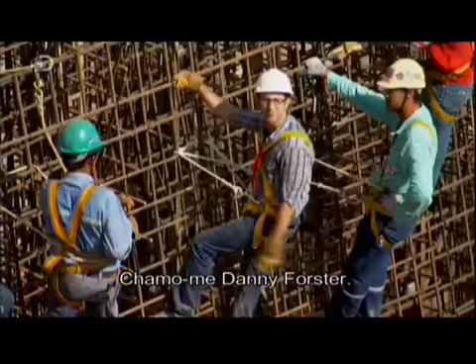As an architect, I travel the world investigating some of the most amazing design projects ever attempted. And right now, I'm going to take you behind the scenes of the most important construction project in Brazil.

In the next few years, Rio will host the Olympics and the World Cup. But before the city takes the world stage, Brazil has got to fix a major power shortage. Brazil had one of the worst blackouts in history, leaving over 60 million residents without power nationwide. A crew of 3,500 is hard at work on one of the largest hydroelectric power plants ever built. To generate enough power, the team is taking a river with more water than the U.S. uses in a single day, and they're moving it.

If you hit a mountain, you go through it. Exactly. To reroute 16 miles of river, they're blasting their way through 7 mountains, creating the largest tunnels on the planet. So we've got to remove this rock obstacle. Yes. We're not using a shovel to do it, are we?

With all eyes on Rio, Brazil is determined to keep the games from going black. Go, baby, go. No stop signs. Let's go.

Welcome to Rio de Janeiro, the crown jewel of Brazil. Located in the southeast corner of Brazil on the Atlantic Ocean, Rio is home to 6 million people, the second largest city in South America.

This city is famous for Carnival, the single largest party in the world, samba dancing, and Christ the Redeemer, the enormous iconic sculpture perched atop Corcovado Mountain. Soon, Rio will be known for something else, as only the third city in history to host both the World Cup and Olympic Games back-to-back.

The entire world will be watching this city when over 4 billion people tune in to see the games. The problem is, Rio may not be ready because this city suffers from blackouts.

Just 1 month after winning their Olympic bid, Brazil suddenly went dark in one of the largest blackouts in human history. For 5 hours, 60 million people were without power. With 750,000 tourists attending the games and over 2/3 of the planet watching on TV, the people of Rio are desperate to keep the lights on.

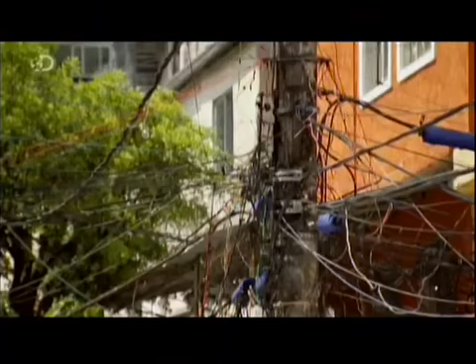The city has less than 4 years to generate enough energy to power 2 marquee events. Their solution lies 3 hours north of the city, where they're building a massive hydroelectric power plant deep in the mountains.

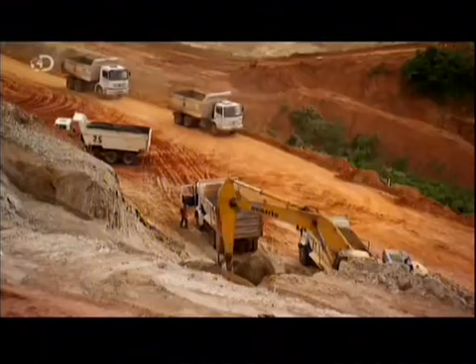So I've just arrived in the town of Sapucaia, and I'm about 100 miles outside of Rio. This town, sitting on this body of water, is the site for the new hydroelectric project, one of the largest infrastructure endeavors on Earth. The Anta and Simplicio project is a job site larger than Manhattan.

Workers here are reshaping some of Brazil's most difficult landscape in order to harness the energy from this, the Paraíba do Sul, a nearly 700-mile-long river that will supply the hydroelectric plant with enough water to fill 1,000 football stadiums. But the location of the river is the project's greatest challenge.

Now, the issue is if they put the hydroelectric plant right here, the reservoir required to feed this plant would cause a big flood, so large that it would destroy all of the forests here and require this entire town and 2 others to have to relocate. So instead of moving the people, what they're going to do is move the river.

To save the town of Sapucaia, engineers are doing something incredible with this winding river, in one of the largest water-moving efforts since the Panama Canal. Starting with a dam, they're diverting the river through 13 canals, 5 reservoirs, and tunneling through 7 mountains.

Water will safely flow towards 3 of the most advanced turbines ever built. In order to handle 780 billion gallons of rushing water, these tunnels need to be some of the widest ever created. If they're too narrow by even a few feet, the water could back up, causing a devastating flood. Right now, I'm heading into the mouth of tunnel 3, the very largest tunnel.

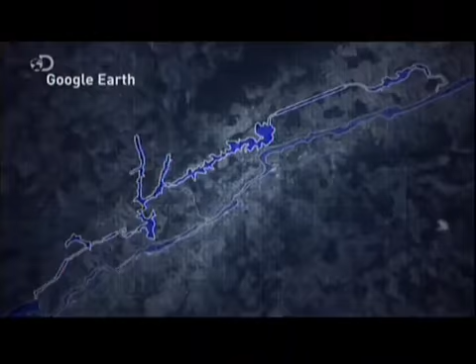And having been in a number of tunnel projects before, I have never seen a mouth of a tunnel this big. This is the longest of 7 tunnels, spanning nearly 4 miles. The further you drive in, the farther you get from daylight, and the darker, the weirder it gets. In total, workers have to remove over 45 million cubic feet of rock, enough to cover Central Park in over a foot of earth.

Going in. With the weight of a 240-foot mountain above, the team has developed a safe way to build one of the largest tunnels in the world. It's a 2-step process. Step number 1 is what you see they've already done: they blasted out this entire 26-foot tall semicircle. The second step is to go straight down. So basically, we're going to drill holes and blast down an additional 26 feet.

Okay, so how many holes do we have in this field right here? Here we have 52 holes. 52 individual holes. And how much explosives are you putting into each individual hole? In the middle, we put 40 kilos per hole. So when we're done today, this will look like that. Correct, exactly. We're not using a shovel to do it, are we?

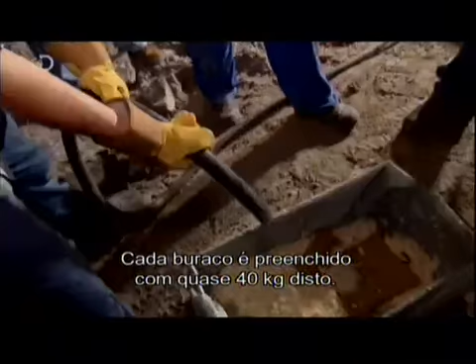What we're using is a liquid explosive. Each 20-foot hole is filled with nearly 90 pounds of the stuff. So Marcel, he's holding a hose connected to a truck, mixing together explosive liquid. Yeah, it's a liquid, it's a mix. It's like you have to put in a little bit of oil, a little bit of vinaigrette, and you make an emulsion, and it makes your salad taste good. This is different, it's not salad. It's a bomb. Correct.

Whoa, there she is. This kind of tapioca-like gooey substance is actually the emulsion, the liquid ammonium nitrate, the water, and the oil. This is a bomb. It's explosives, I have a hose full of it. All right, going down, all the way down.

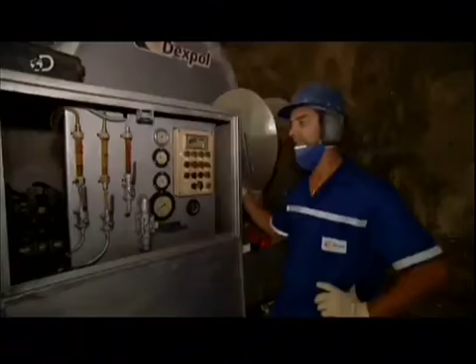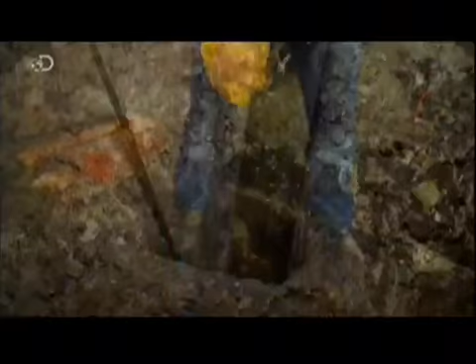Made on site, this explosive liquid emulsion is more stable than dynamite. Okay, I'm at the bottom. Give me the juice. It fills all the empty space in each drill hole, giving the explosion the maximum force needed to break up the rock without causing a cave-in. So as the explosive comes out of my hose, we're slowly pulling it out, filling this thing up. Full? Yeah. All right, so now we have 52 individual holes.

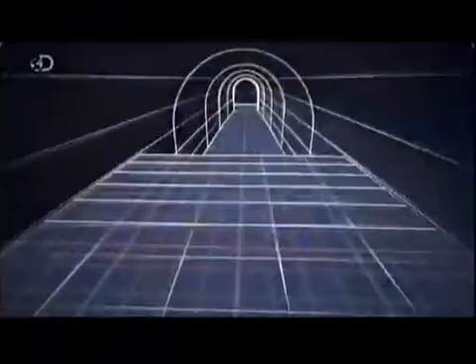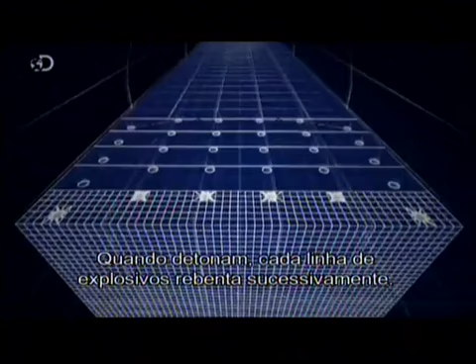Each and every one of them is loaded with a fuse and an entire column full of this liquid explosives. Now we're gonna tie them all together and run away. The holes are dug in 5 lines. Blast engineers connect the fuse in each hole with a series of color-coded time delays. Once detonated, each line of explosives blows up in succession. Like a wave, it pushes through the next 30 feet of rock.

Okay, so am I looking at the plan right now? Are we looking down? Yeah. So this isn't just one gigantic bomb going off? No, we cannot do this because of the vibration. If you explode everything, you will shake the tunnel. Bad idea. Yeah, it's not a good idea.

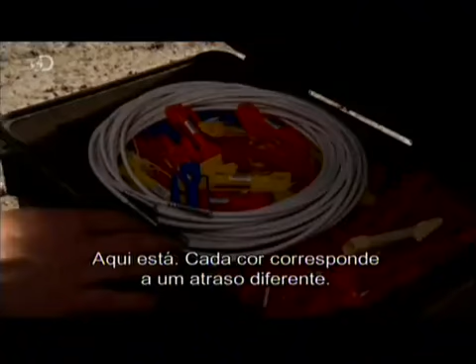Voila. Okay, so each color corresponds to a different delay. So which is which? 30 milliseconds. 150 milliseconds. And so basically by mixing and matching and combining these delays, we can create the shape of the explosion we want. Yeah, that's it. All right, let's do it. This is what it's about, right?

Right below me is one column full of explosives. When it goes off, there'll be a 50 millisecond delay, and it goes on to the next hole. Okay, stick it in, and now you can feel the wires touching the charge. And now I'll take this red piece, and it's in, okay? Live explosives. Let's get out of here.

All 37 delays are now connected. The strategic blast pattern is ready to go. So once we light the fuse, how long do we have? We have 7 minutes to leave the tunnel.

Okay, so we're going to evacuate the tunnel. Getting all the lights, the crew, the gear, everything out. Yes, correct. But not everything is evacuating. The intrepid Danny Cam is going to try and capture the moment for us. You see, the last time we tried this, our camera did not survive the blast. Hoping for a bit better luck this time.

All right, looking good. All right, you are set. Be careful where we step. Okay, that's a bomb, another bomb. So in my hand I have a stopwatch with 7 minutes set for the blast time. In my right hand, I have a lighter. Both are required to safely detonate a tunnel. So, okay, here we go.

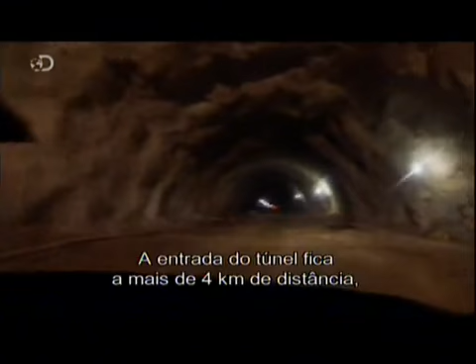Emergency brake. All right. The mouth of the tunnel is over 2.5 miles away, making it almost impossible to reach in just 7 minutes. We're gonna make a left here. Oh, good thing they told me that. Okay, gotta change gear, sorry dude. Our only way out is a small access tunnel located a half a mile from the blast site.

This is ridiculous. I'm actually driving as fast as I can, but the roads are really crappy, so the idea is don't get a flat. Oh, come on, come on. There it is, I'm almost there. I can see the light. A minute and a half to go. Come on car, come on. Get up there, come on, damn it. You okay, Philippe? Yeah. Woohoo!

That just went off the moment we got out of that tunnel. That was not 7 minutes. How many minutes? The phone jumped out of my hand, I was driving so crazy. 6? 5? 5, that wasn't 6, that was. So the blast might have gone off a bit early, but the delays created the expected chain reaction, putting them 30 feet closer to redirecting the river.

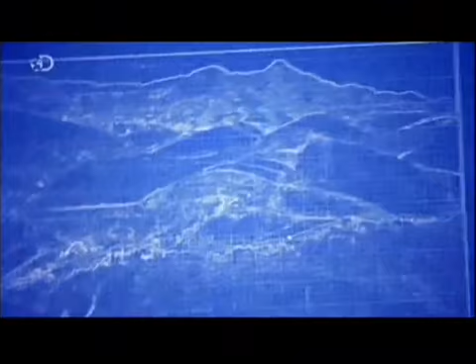I think we're stuck.

Brazil is the most visited country in South America. Tourism is one of its fastest growing industries, nearly tripling in the last 10 years. And Rio de Janeiro is at the center of it all, with an annual event twice the size of Carnival descending on this city, partying non-stop for 4 days straight. Now, to put this in perspective, during the Olympics you'll have that many people and more in this city for not 4, but 16 straight days of events.

Imagine the televisions, all the air conditioning, all that samba dancing. The electrical loads on this city will be unprecedented. The Olympics will bring 750,000 more people to Rio, taxing an already strained power grid. To keep the lights on, the Anta and Simplicio hydroelectric project will supply nearly twice the energy that the city needs for the games. To generate that much power, workers are moving a massive river through a series of tunnels and canals, channeling all that water to an intake valve that directs the river to a powerhouse.

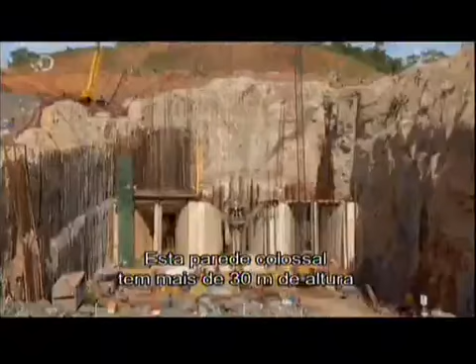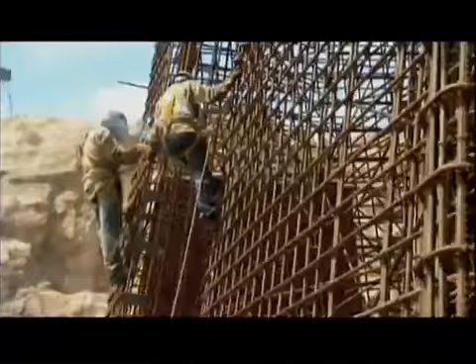As this enormous wall of redirected water comes out of the final canal, it now meets something like the drain at the bottom of a really big bathtub. But while the water drains out, something else has to hold back all that remaining water. Now we're talking about 780 billion gallons of water. What can hold back that much water? Well, it's got to be a really, really big wall. This massive wall is over 100 feet tall, covered in over 4,000 tons of concrete. Its core is reinforced with nearly 75 tons of steel rebar, making it 100 times stronger.

So at this height, I'm basically at the midpoint of the intake. Water would be going in below where I'm standing, down into the hole. But up here, the wall that's holding back the rest of the water is right here. And the guys that are actually building this thing, giving it its strength, installing its rebar, well, they're doing that up there. Well, here we go.

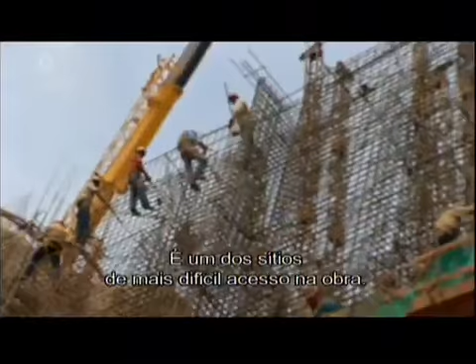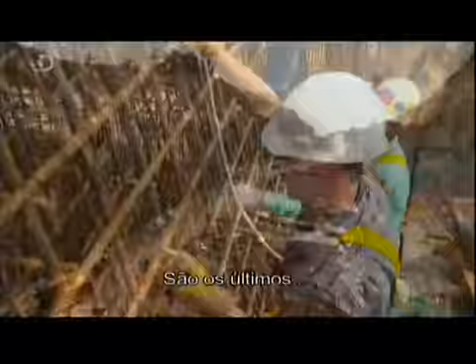We're off. This is one of the hardest spots to reach on the entire job site. One tied off. Workers have to climb a steep 79-degree slope. Not looking down. 10 stories up. All right, last couple. Okay. Woo! Top of the summit.

How you doing? I'm Danny. Hello, who's this over here? Cleope. Cleope and Aldo are going to be my two teammates as we install some last bits of rebar on the very top of this wall. It's going to hold back hundreds of billions of gallons of water. That's a lot of water. See? So the crazy thing is, at this height, at the very height of the wall, the way to get more rebar up to us so we can finish this wall is like that.

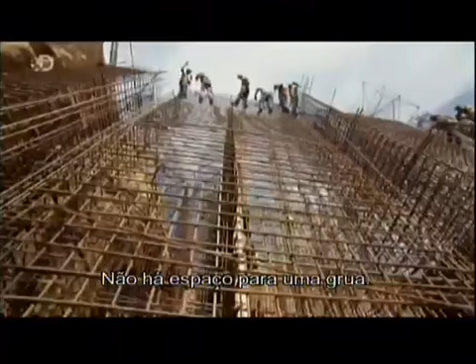There's no room for a crane at the top. So a team of 6 workers hoist each 65-pound piece of rebar using nothing but 160 feet of rope.

All right, okay. Watch out, watch out. All right, coming down, watch your shoulder. Come down by me. Okay, we're at the right height. And now the rebar is generally where we want it.

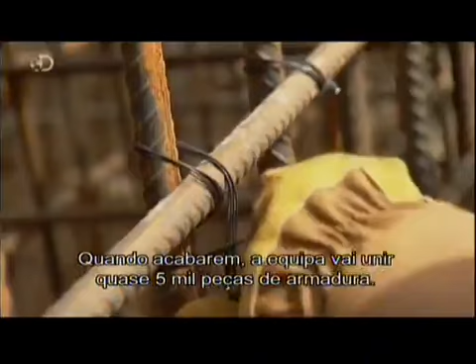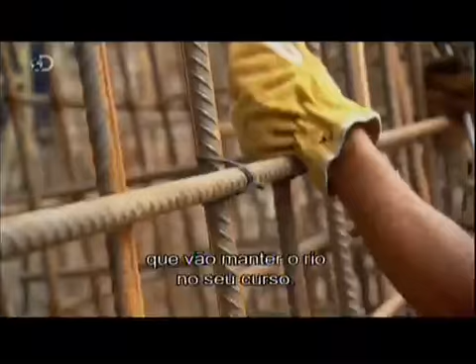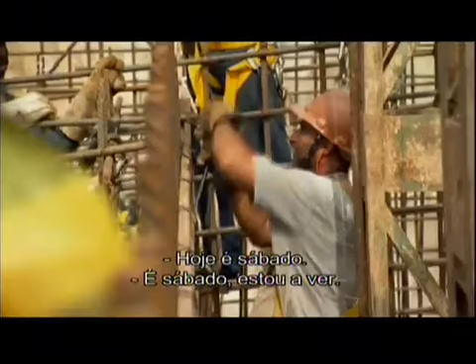So, why is everyone so happy? Why so much cheering? Today is Saturday. Which means tomorrow's no work. No rules, got it. All it takes is a day off and Brazil just blows up.

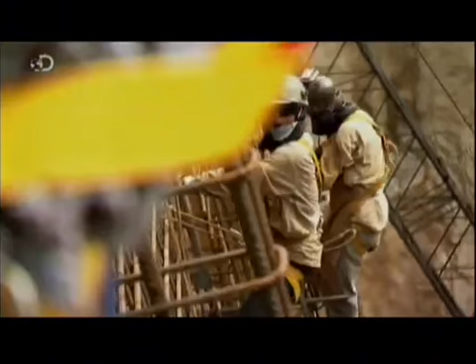There it is. Oh my God, it's like a prison break out here.

Well, it just goes to show just how hard these guys have been working. 6 days a week, almost 16 hours a day to build what will be one of the most important pieces of infrastructure ever to be built in Brazil. And why? To make sure this city, when it hosts both the World Cup and the 2016 Olympics, they don't have a blackout.

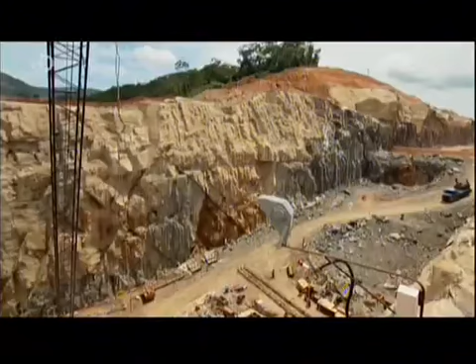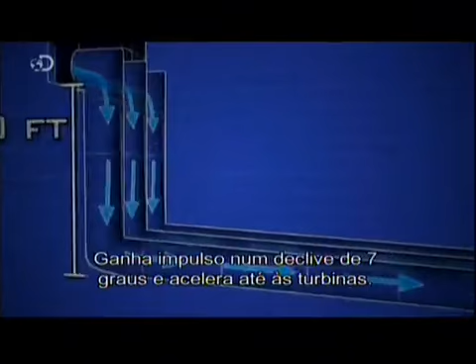Engineers expect a wall of water nearly 100 feet deep to barrel into the intake wall. After the water passes through, it drains at the base of the wall and enters 3 underground tunnels called penstocks, which begin with a 10-story drop to speed up the water. It gains momentum down a 7-degree slope, rushing towards the turbines.

The faster the water, the more electricity they generate. So that's the turbine down there. Yes. And the central idea with the penstock is to do what to the water? Increase the speed and the pressure, both needed to move the turbines.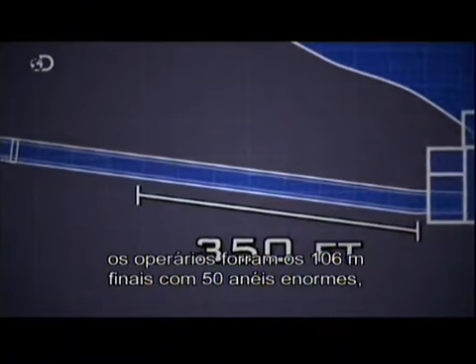And so the water's moving how many meters per second? 10 meters per second, so that's like 20 miles an hour. Water moving that fast would tear away rock from the walls and ceiling. Its force is stronger than a massive ocean wave and capable of causing a tunnel collapse. To reinforce the penstock, workers line the final 350 feet with 50 massive rings, totaling 800 tons of solid steel.

Now, one of the fascinating parts of this process is they're moving a big, heavy object, but they're not using a crane because we're in a tunnel, right? There's no room for a crane. So rather than having a crane operator, we have a truck driver, and an angry one. Let's go meet him.

All right, here we go. Hello sir, how you doing? You know me? Anderson. I'm Danny, nice to meet you. Are you nervous? Heavy piece, we're in a tunnel. Keep it cool, let's do it. Rock and roll, all right.

The ring is attached to a trailer and is more than half the weight of the truck. It'll take everything this truck has to get it into place. Okay, so Anderson wants to crank the RPMs up because he's actually going to want a ton of torque to stay on the truck, so the weight of that steel piece doesn't actually drag the truck backwards.

He's letting the engine tune up. Also, I might add, from afar, Anderson has a very tough exterior, kind of tough truck driver appeal. But here in the cab, this guy's a teddy bear, huh? Yeah, he is, he loves it. All right, here we go, so we're popping in gear.

Wow, I mean, Anderson is basically smacking into the back of the steel ring and quite literally pushing it.

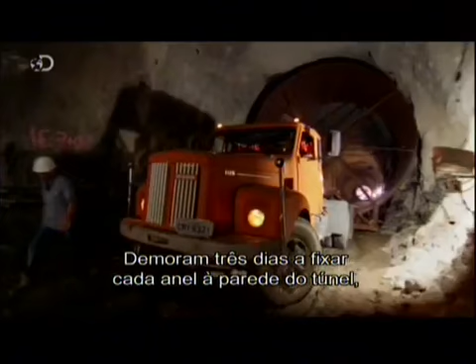It takes 3 days to secure each ring to the tunnel wall, and the crew has 3 penstocks to complete and another 146 rings to install. But for now, this operation has come to a grinding halt. There's a flange on the outside of the steel that kind of protrudes.

This bump out of concrete. So not only is it stuck on the side of the wall, it's actually blocking itself from getting out. We're going to be here for a long time.

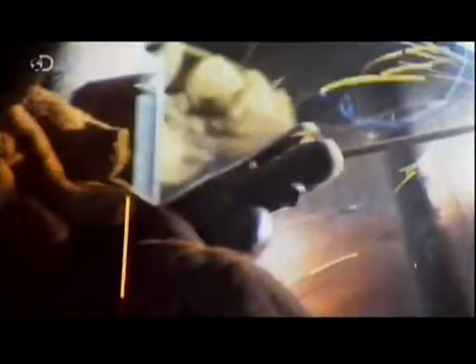Up next, sealing the most advanced turbine ever built with a 3,000-degree welding stick. Touch the rod to any metal.

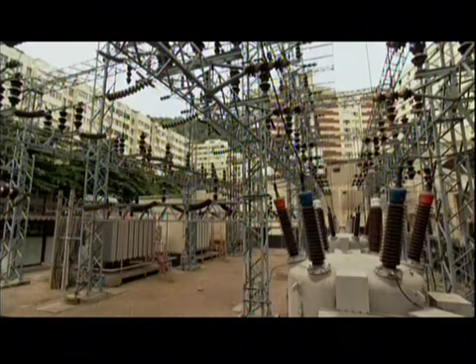Brazil is the 3rd largest consumer of electricity in the Western Hemisphere, with usage doubling in the last 25 years. This country is turning to its greatest resource, water. There are many different ways to make the electricity we need to power our cities. You can burn coal, you can burn oil, you can build a nuclear power plant, you can have a wind farm, even a solar farm.

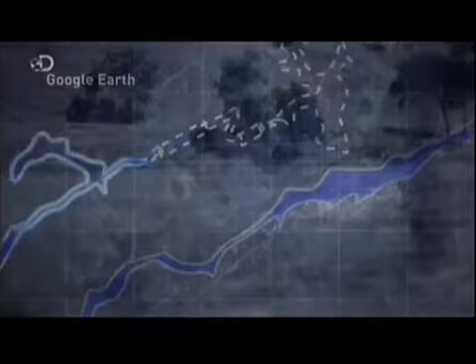Now, for a country like Brazil that has 1/5 of the world's fresh water, a water solution makes obvious sense. The Paraíba do Sul is one of over 120 rivers. In the last 3 years, workers have cleared a new 16-mile path through 7 mountains, removing 650 million tons of rock.

To this, right here. This thing behind me is called the spiral casing. And this is where the water finally makes electricity.

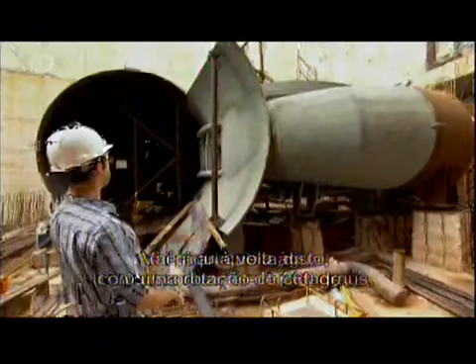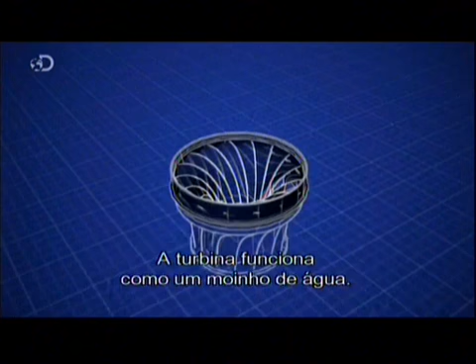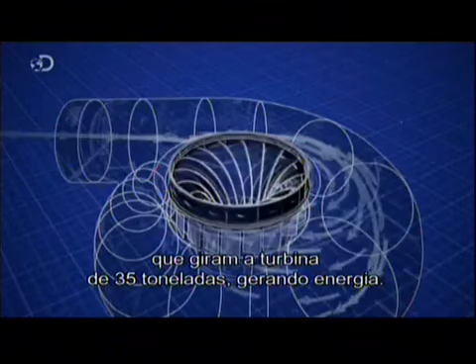It's going to spin around this, pulling a 360-degree turn, all the while rotating the blades of the turbine. The turbine acts essentially like a water wheel. As water rushes around the spiral case, it pushes 13 angled blades, spinning the 35-ton turbine and generating power.

The challenge: keeping the water from losing speed as it flows around the tube. The answer is the same thing we use when we're washing our cars with a garden hose, right? If you pinch the garden hose, the water goes faster. So if we decrease the diameter of the hose, we increase the pressure of the water. Same principle, just much bigger.

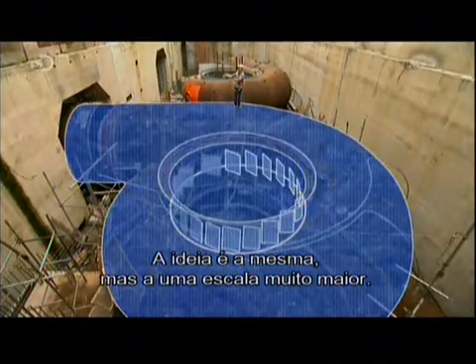The water comes into the spiral casing at a diameter of 13 feet. And as the water goes around the curve, the tube gets progressively smaller, starting at 13 feet and ending at 4 feet. So when the water comes in, it travels the exact same speed all the way around the circle. The 62-ton spiral case is actually composed of 70 steel plates.

Coming in, here we go. Okay, to make the turbine spin evenly, it must be turned into one smooth, frictionless surface by a team of 4 welders. All right, your name? Quasmi, I'm Danny. Quasmi, you're the welder, huh? So what Quasmi's up to is he's welding on these pad eyes. We'll put one on this piece of steel. We're going to break it in order to close the gap between 2 pieces of steel, weld it up, and make it one smooth curved surface. Okay, let's do it. Gloves?

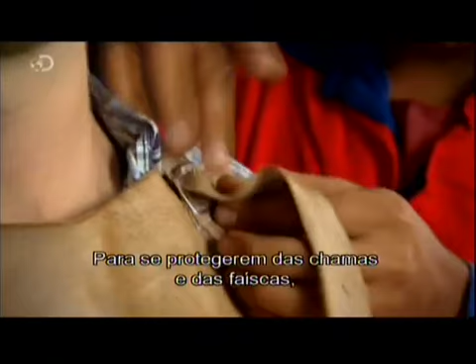Quasmi's welding stick burns at 3,000 degrees. And to protect against flame and sparks, these guys wear welding jackets made of fire-resistant leather. Beautiful. Okay.

Are you okay? What do you think?

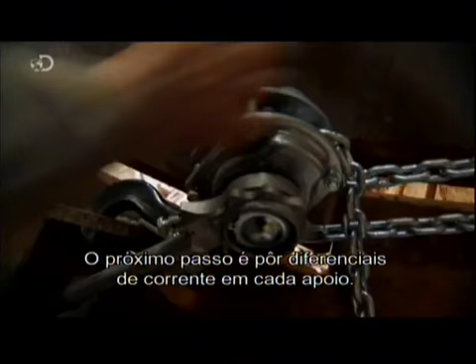So we're going to have to have it welded more. All right, so Crosby's going to actually finish the thing up. Now, next step is the guys will put chain blocks onto that pad eye. Once we put tension on the line, we can pull the pieces of steel closer together, because in the end, they're taking these different individual curved segments and making one long curved tube that lets the water rapidly turn around and spin the turbine.

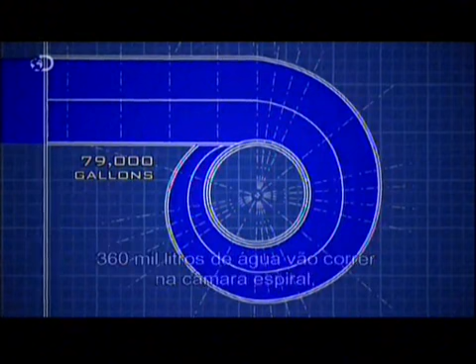79,000 gallons of water will rush through the spiral case, with nearly the same force as a rocket during liftoff. Powerful enough to rip the 1-inch thick steel plates wide open.

Now, to prevent that, the crew must entomb all 3 cases in over 2,000 tons of concrete.

But they have to first make sure the cases don't leak, by filling them with water. The problem is you can't fill it with water if you have holes in it. So right now what we're going to do is plug up the holes of that donut to let them fill it with water. We're going to do that with this big cylinder right here.

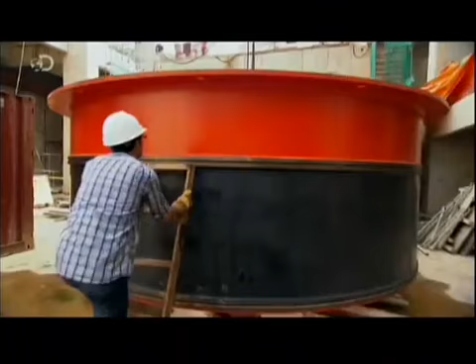The plug is actually a 32,000-pound steel ring. All right, let's shackle it up. And once lowered into place, it will seal up the spiral case, making it watertight.

Okay, so everything in Portuguese is different from English, even the crane operator instructions. So for example, going up with the crane? Para cima. Cima. Para cima. And for going down? Para baixo. Para baixo. All right, so he gives us a thumbs up.

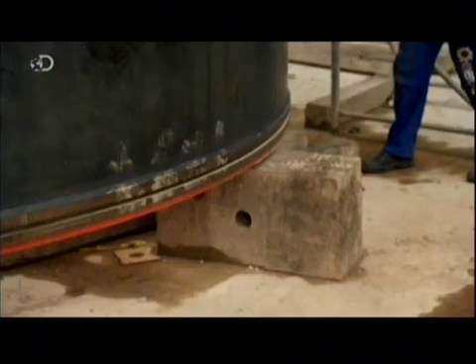Okay, bring her up. Here she comes. 16 tons, wide load. All right, clear the way, we're going to start traveling. Now, one of the key things to keep in mind when you're flagging a crane operator is no matter where the piece is, no matter where you are, you have to maintain.

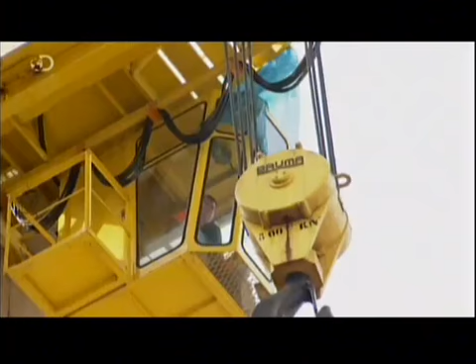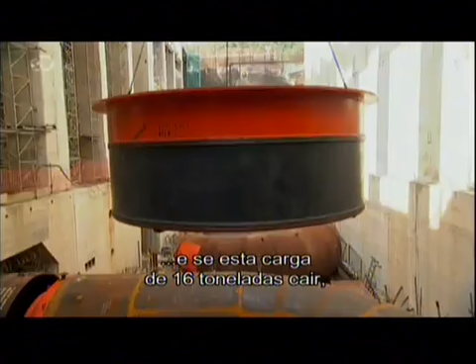Each spiral case takes workers 2 months to assemble. Very slowly. If this solid 16-ton load falls, it would crush the case like an empty soda can.

Now I have the piece above the hole. There's moments of more progressive refinement. We got it this far, and now we're going to get even closer as the piece gets closer to its final position.

Here, literally, millimeter by millimeter. You can see it just to the threshold with absolutely no room to spare. Look at that.

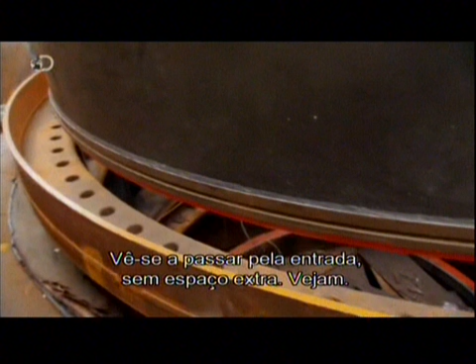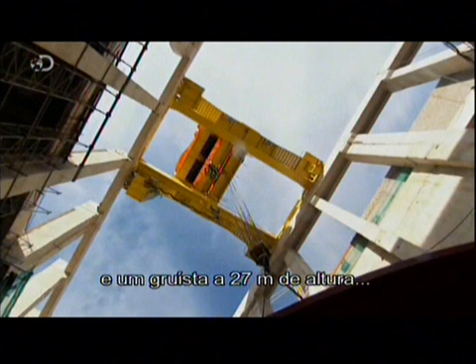90 feet up, this way. There is no room for error.

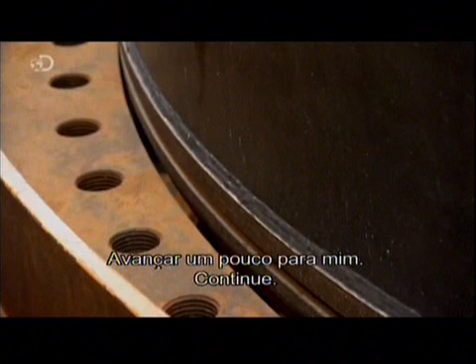Come to me. Keep it coming. Stop. Right there. Good. All right, so now we are lined up all around.

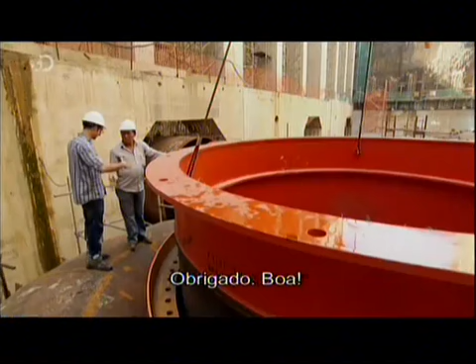The circle should fit into the hole. Check it out. Everyone seems happy. So we're good, we're successful. Nobody got hurt. Cool stuff. My first time operating a crane via hand signals, did a decent job.

Rio has 1.3 million people living in slums called favelas. 20 years ago, these neighborhoods had no electricity. Today, their power comes largely from direct taps into city power lines, an extremely dangerous power source.

One of the more fascinating reasons why Rio beat out their competition of Madrid, Chicago, and Tokyo is that winning the Olympics isn't just about showing off a shining, gleaming city, but rather it's also about using this as an opportunity to transform a place. So this favela, one of the poorest neighborhoods in Brazil, is also going to benefit from the games. All the new infrastructure, all the new construction, all the new housing will affect this area.

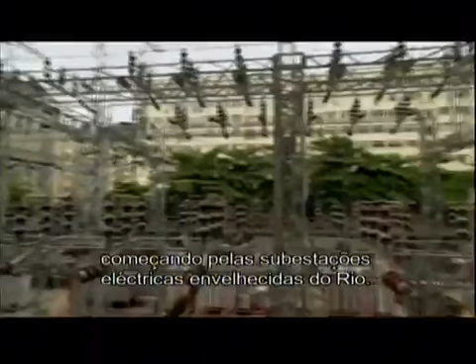So winning the Olympics isn't just about sports, it's also about transforming a city. Brazil is spending $14 billion on new infrastructure, changing not only the favelas, but the city's entire power grid, starting with Rio's aging, open-air electrical substations.

So, Rodrigo, this substation is in downtown Rio. For example, that's a condominium right there, that's an apartment building. People are living all around this thing. Is this totally open? Yes. It's not good.

It's very dangerous. But mainly, the problem is it's more vulnerable because you are exposed to birds, animals, and the ocean salt, from salt from the ocean, and the rain falling on this thing. Even a pigeon could fly into the substation and the lights go out. Yeah, it's not a good situation.

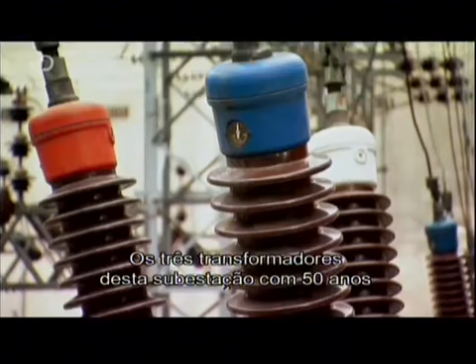The 3 transformers in this 50-year-old substation step down the voltage, making it safe for use in the home. They're being replaced with 3 brand new ones, much smaller and safer.

And this, what I'm looking at right here, this is the actual transformer. Yes, so we have 3 of these, and they're able to make the same amount of power as this entire old substation. It's the same power, all of this substation inside this roof and all covered. So it's smaller, more efficient, covered and protected. I like it.

Each transformer weighs 77 tons. It's not on, right? It's not going to electrocute me? No. It took the crew and their truck 3 days to move it off the street.

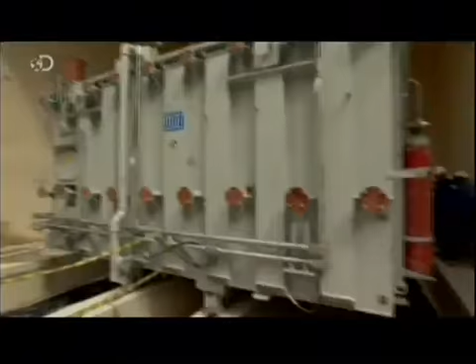Now, just feet from its final destination, there is no room for a truck. Okay, Guilherme, explain to me our situation, because we're standing...

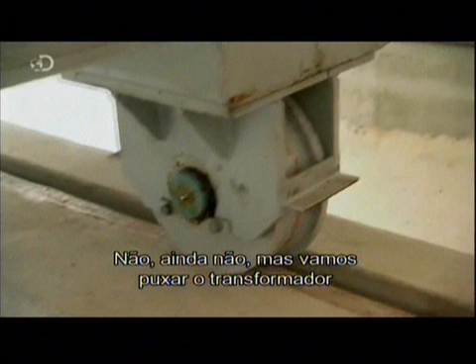Each transformer has to be dragged the final 17 feet using a ratchet pulley system. You can do it, man. It weighs more than a tank, and each crank moves the transformer just 2 inches. It's like training for the Olympics here, in the transformer movement category.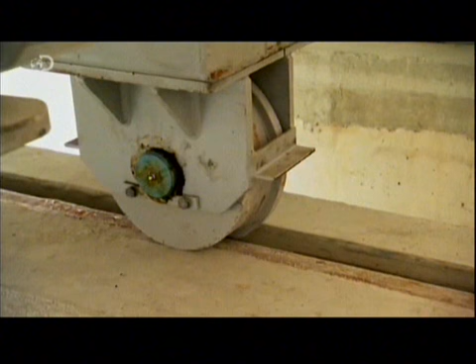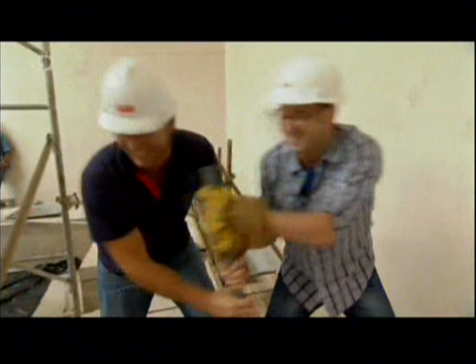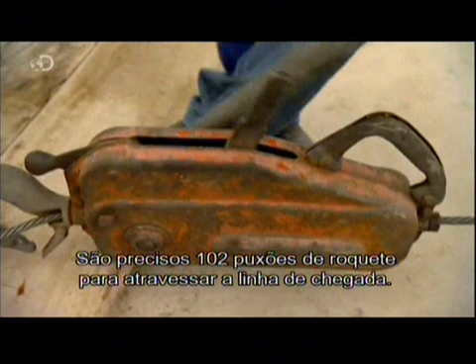My God. No, actually it takes 102 strokes of the ratchet to cross the finish line. Looking good, there it is, transformer in place, moved about 17 feet. How? On the backs of champions.

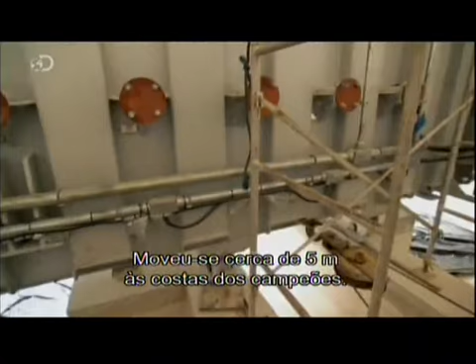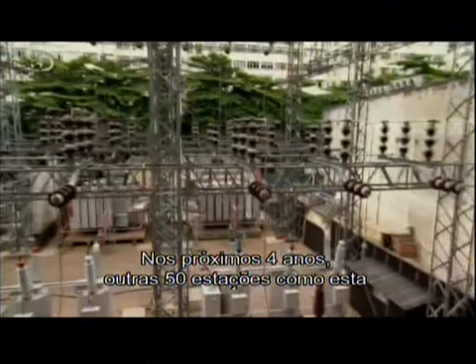In the next 4 years, 50 more substations like this one will be upgraded, bringing power safely into homes. But getting the power to these substations presents an even bigger challenge.

Brazil is a country that gets almost all of its power through hydroelectricity.

And it would make sense that a hydroelectric plant would be located where the water is.

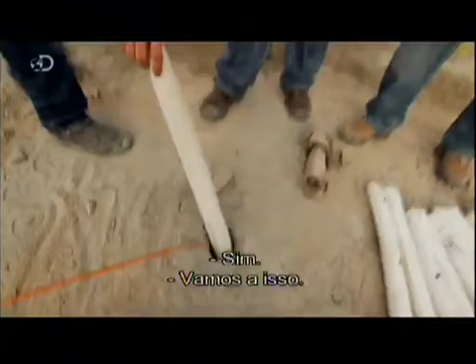And we're going to lower this down the hole and essentially just fill it with these white sausage-like explosives. Let's do it, one at a time. Just drop them in. Yeah, it's okay to drop them 30 feet. There's no risk? No problem, not at all.

Oh, the noise is so bad. You can hear it, it's like bomb-on-bomb action. Each hole is filled with 50 pounds of explosives. And we're in, we're good.

I got a fuse. Coming up, we gotta go, come on, we have only 3 minutes to escape from the biggest blast I have ever seen. You're driving like maniacs, get out of here.

Just 1,600 feet of rock separated a river from this hydroelectric powerhouse that could end Rio's energy problems. Nothing that 1 ton of explosives and a fuse couldn't solve.

Okay, so right here, 150 centimeters equals how many minutes? 3 minutes. The blast will send nearly 6,000 tons of rock flying throughout the valley. The 3-minute fuse leaves us barely enough time to safely clear the blast zone. So the cars are now backing up, all 4 doors open, so as soon as we light the fuse, pack in the car and go.

Yes, okay, it's like a movie, it's like Cannonball Run here. All right, as fast as we can. Let's go, the area's being cleared, the siren is going. We're gonna light this fuse, and that literally means we'll have 3 minutes to run into that car and get way away from here, because within 3 minutes or so, this entire rock mass will start flying in the air.

Set. All right, fuse is lit. We gotta go, we gotta go. Come on, come on, come on. Watch your step.

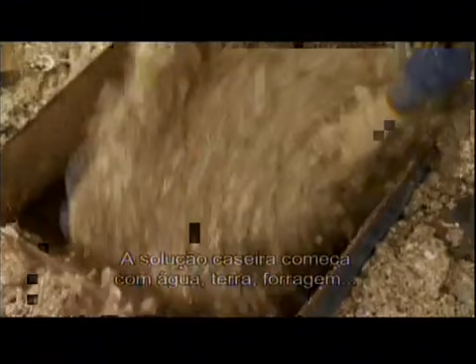These are the seeds right here? Yeah. They have about 7 species.

So it's this mixture, this blend of seeds that'll actually enliven the soil, give it some strength, and minimize that erosion. Yeah.

All right, here we go. Finally, they add a natural fertilizer.

This is the good fertilizer. This is organic, healthy. Is this poop? It's poop, with soil, but it's organic, you know? Yeah, it's poop. It's poop. Organic fertilizer, what do I think it was? It's poop.